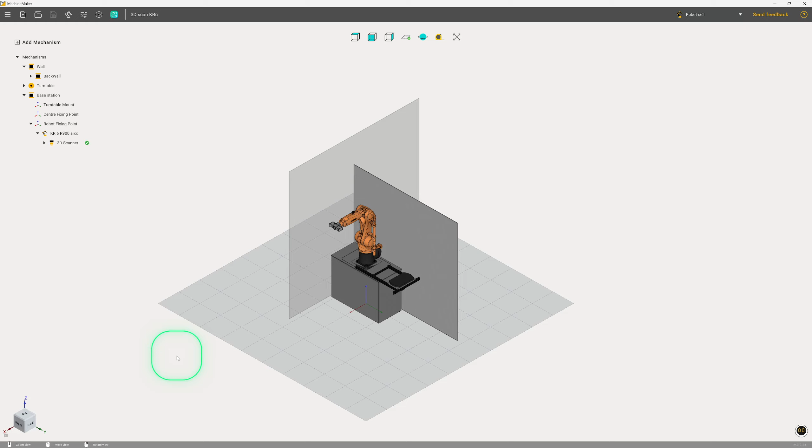So before we start with any kind of machining processes, it's worth taking a look at what the actual necessary setup is going to be for being able to program toolpaths for 3D scanning. And obviously the first thing is to actually incorporate the replacement for what would normally be a spindle in MachineMaker. And in this instance, what I've done is I've modeled a copy of the 3D scanner that I'll be using along with the holder that I designed for it, and I've set that up as the end effector, as evidenced here.

Obviously, when you do this, you're going to need to be super careful about how you set your calibration, because the last thing you want to do is break an otherwise expensive 3D scanner using an even more expensive robot, because that would be awkward all round, really. The other thing that I will emphasize with this incredibly highly is you really need to be on top of your collision detection for exactly that reason.

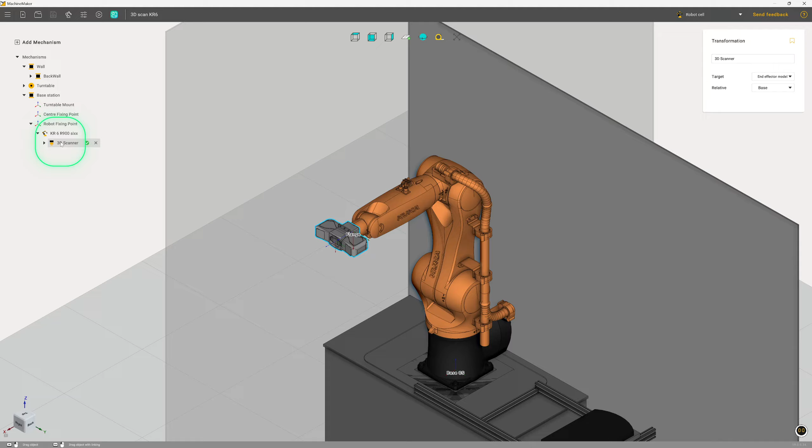So, in order to set up a 3D scanner end effector, what I have done is, after importing and fitting and setting the TCP, I went into the model designation, and having set up the base, I then set the type to custom. Now, if you click on the type option here, typically it starts out as a mill tool, but as you can see here, there are many different types of tools available here. But custom allows you to set the configuration using this ellipsis here. And in doing so, I went all the way to the bottom and I chose painting.

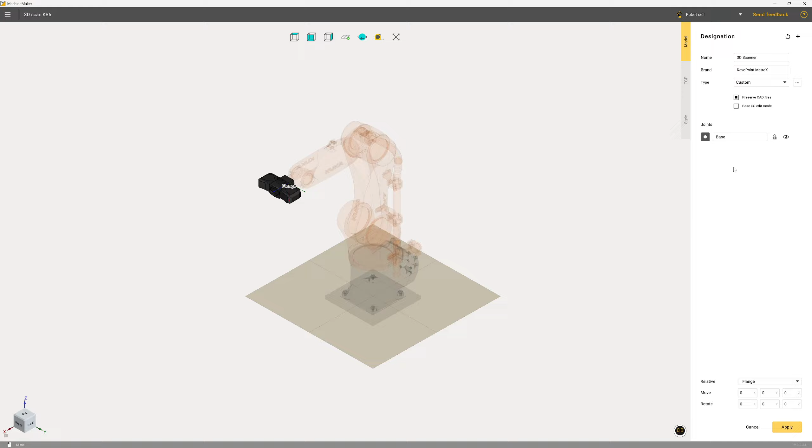Now, ENCY has got a rather good set of painting tools. You will need to check your license to make sure that you've definitely got this applied. You can make do with using a custom milling operation for this. We will go into that around the last lesson of the video just to cover it, to make sure that people know what they can do. But for the moment, I'm going to stick with painting because I know that this works. So, beyond that, there are no particularly special setups here.

With the collision detection setup, though, it is something that is absolutely worth doing and can be found under the assembly settings and under collision. You can prepare a collision detection dataset using this slider and this button here. Once you have done that, you will need to run the collision simulation as well. So it'll take a few minutes to prepare the collision data.

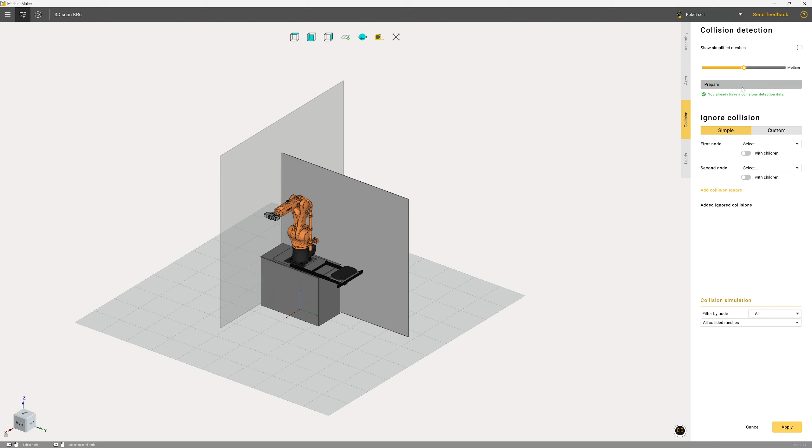What it does is it evaluates the model for the robot and all of the surrounding elements. The collision data set is then put through a series of motions, and obviously it registers when there's an intersection there, and it keeps track of what that range of motion is. This process, as I say, takes a few minutes, absolutely worth doing though. Last thing you want to do is break your expensive kit just because we didn't go through the collision detection systems.

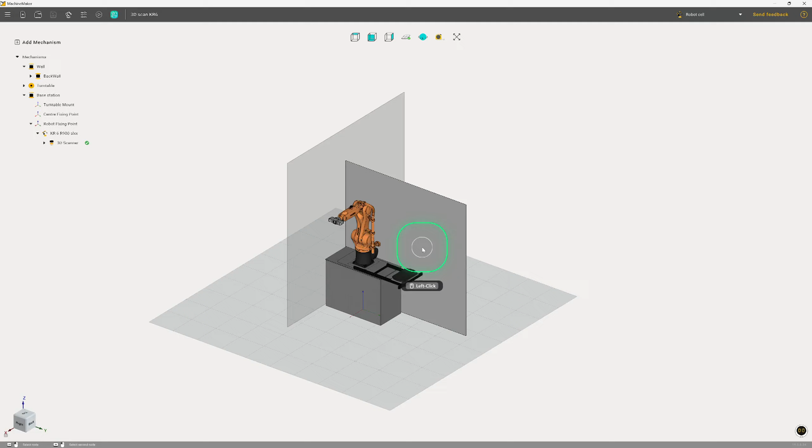Beyond that, the standard setup applies. It's everything as normal. So this particular setup here is the one that I have access to, and this is the one that I'll be using for the rest of the video. In the next video, we're going to take a look at our first operation setup.